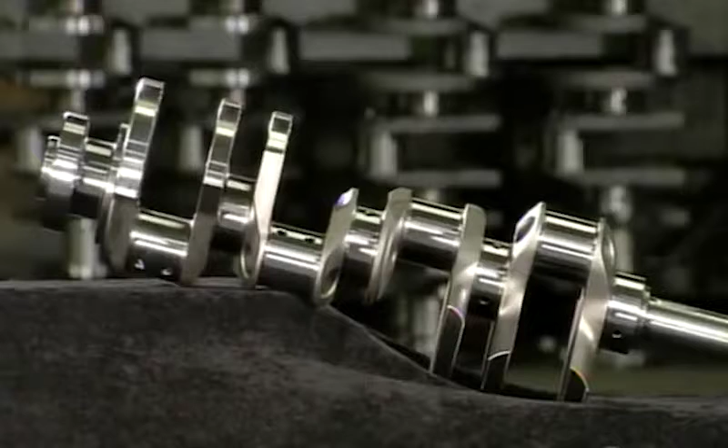From this subject, automotive component manufacturing, the car component that I chose is the crankshaft. The crankshaft is essentially the backbone of the internal combustion engine. The crankshaft is responsible for the proper operation of the engine and converting a linear motion to a rotational motion.

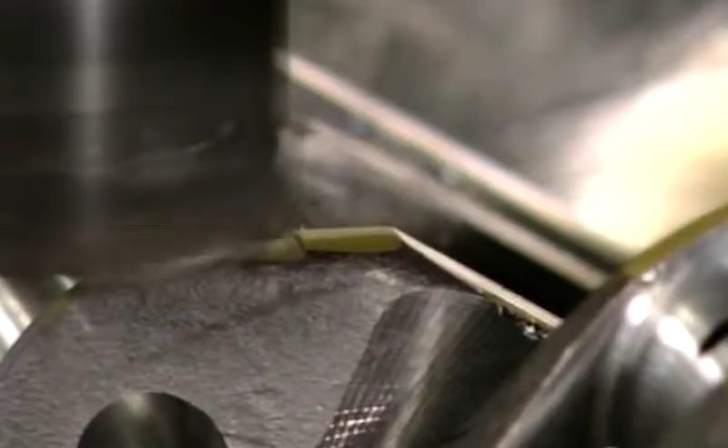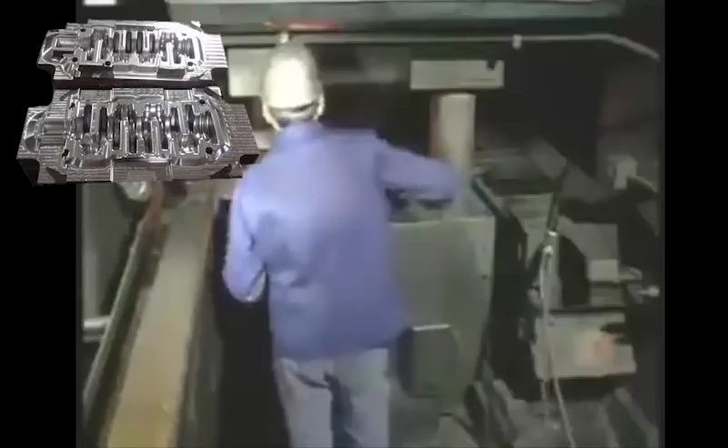For the manufacturing process, crankshaft-sized billets are induction heated up to 2500 Fahrenheit, or 1300 Celsius, for forging temperature. The heated billets are placed into a giant press with a forging die applying 150 to 250 tons of pressure. Afterward, the workpiece is clipped. The flash goes to the scrap bin.

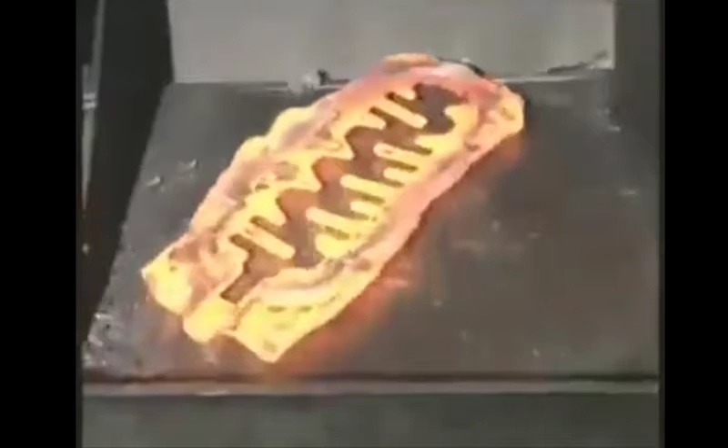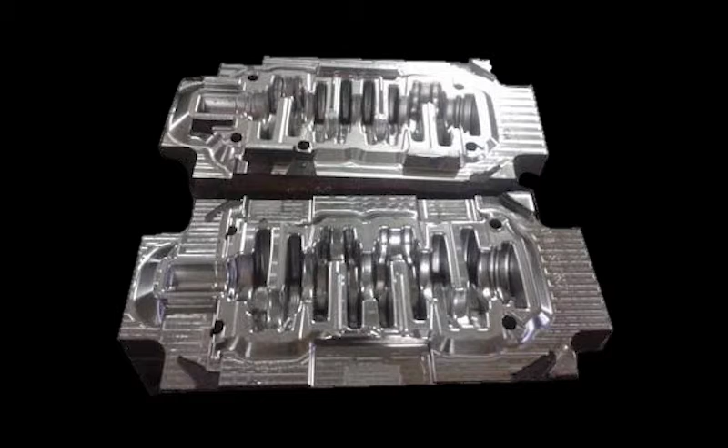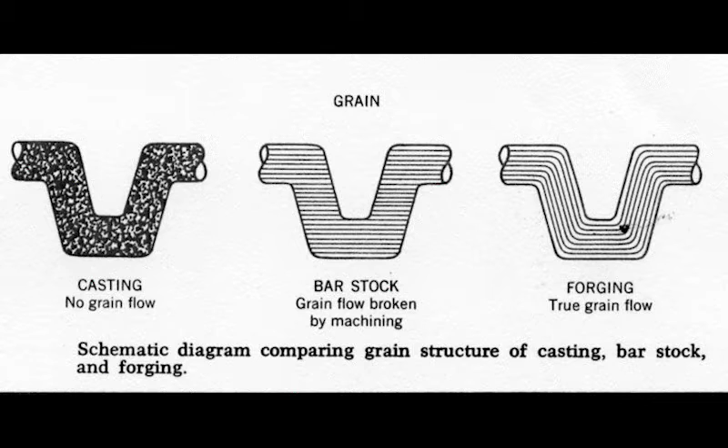The crankshaft is transported to the next station, a twister, an operation in which 5 strokes of the shaft are properly aligned relative to one another by twisting. The forging process itself significantly compresses the grain structure of the forged crankshaft. It creates a much more uniform grain structure compared to its cast counterpart. And this means that a forged crankshaft is typically not just stronger but significantly more ductile when compared to a cast crankshaft.

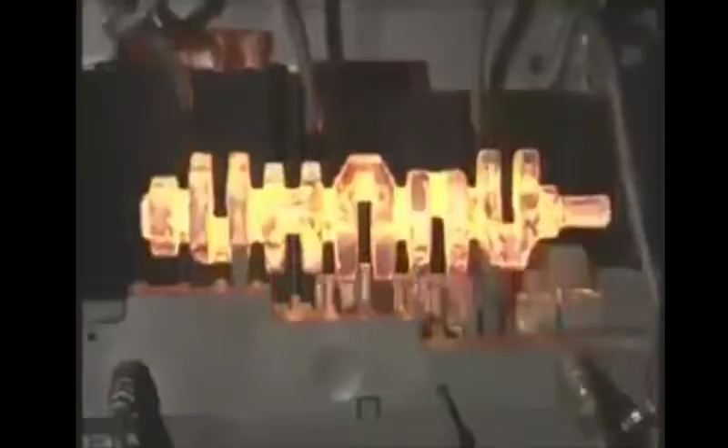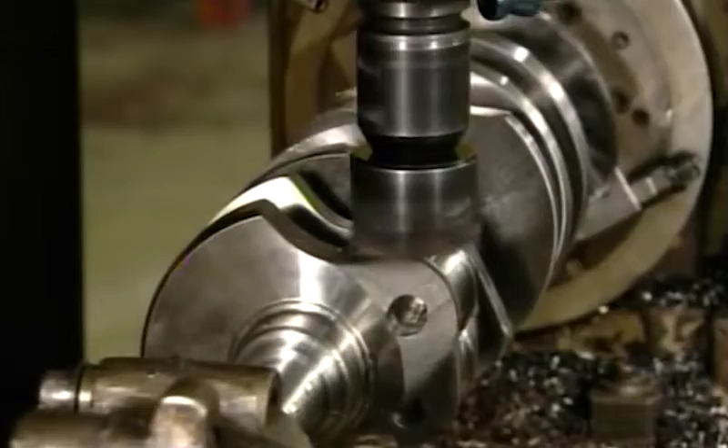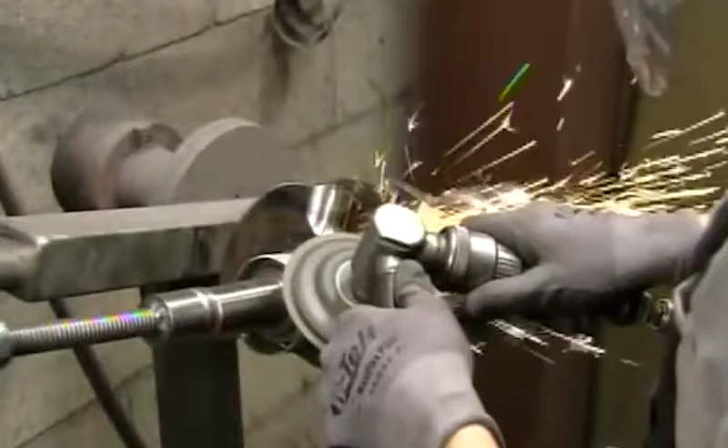The final operation in producing a raw forged crankshaft is hot sizing. During this process, the crankshaft receives its required accuracy in form. The CNC machine shaves off several dimensions in the counterweight process. This process slims it down for balanced performance. A turning machine drills a hole at one of the bearings to reduce the total weight. Next, the worker removes marks that the machine left on the metal.

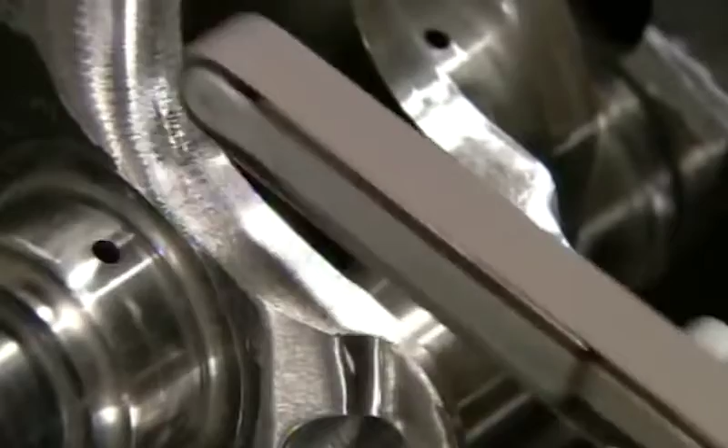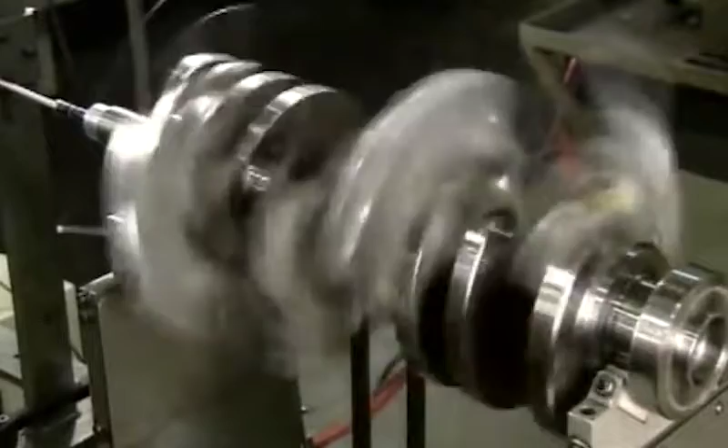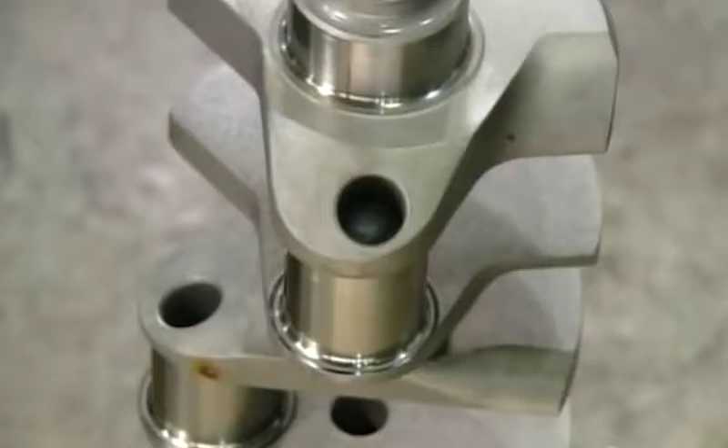Fine glass bead is used to remove the sharp edges and give a consistent finish to the crankshaft. The crankshaft spins in a lathe to remove a precise amount of metal to make a fine finished surface. The crankshaft takes another spin with a sensor to detect any unbalance. Then a measurement of the degree of straightness is made. If there is any unbalance, the worker uses a special radius chisel. From this view, at the left is a pass on straightness and balance. We can see the difference in the structure.

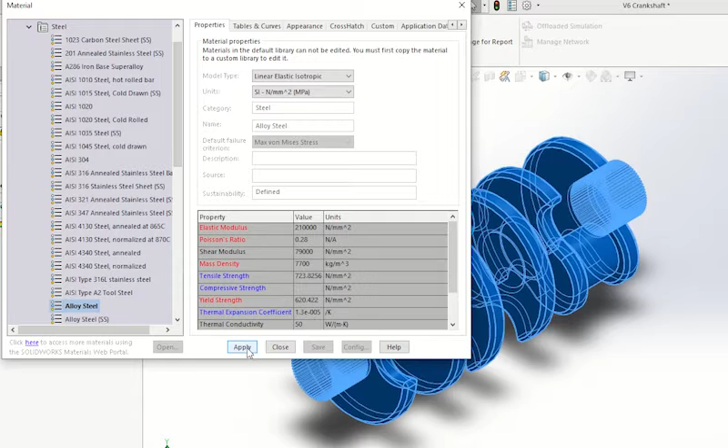For simulation, click on New Study and click Static. Change the name to Crankshaft Force Test, then OK. Next, select the product and apply the materials. I use alloy steel as the material. Then apply a fixed geometry. I assume that the fixed geometry is at the end of the left and right side.

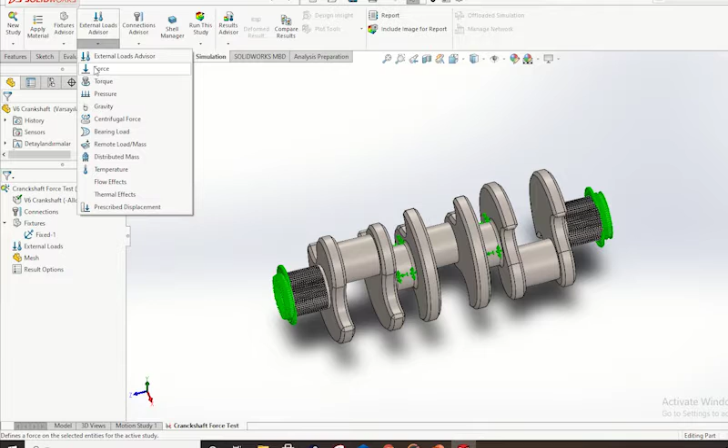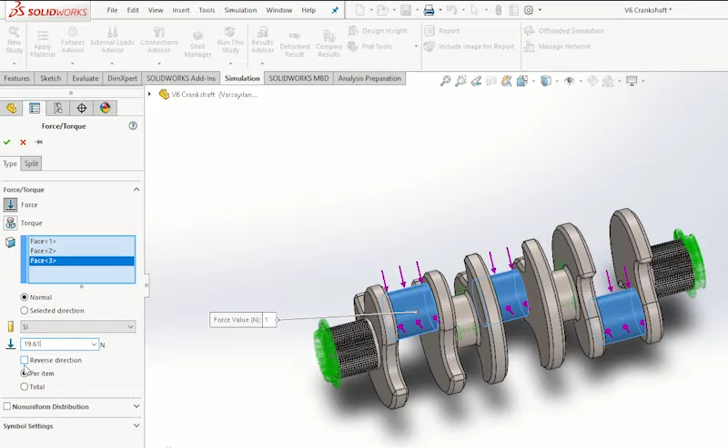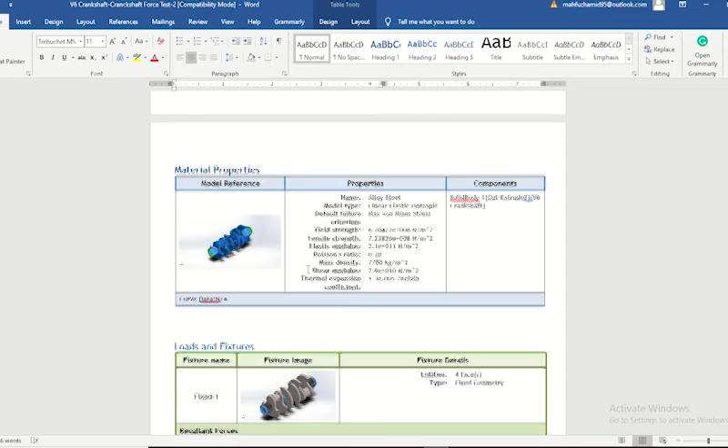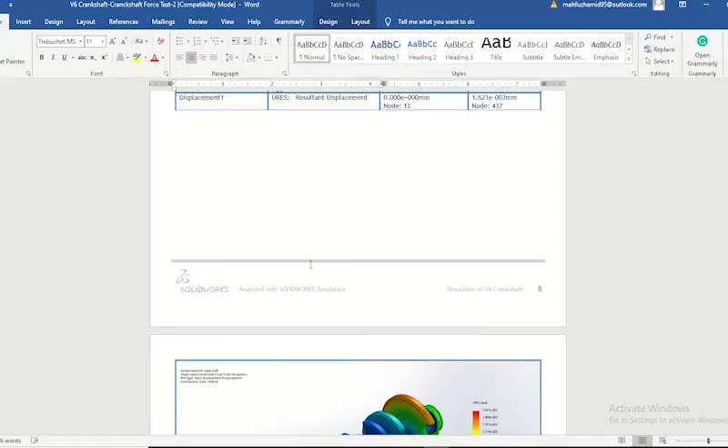Then apply a force. I select 3 directions and the Newton is 19.61, converted from 2 kg. Assume that each piston is 2 kg. Then we can run the study. So the result. Then to bring up a report. This is the report result. If you want to show the animation, right click on stress and click on animation. So it will display the force motion.

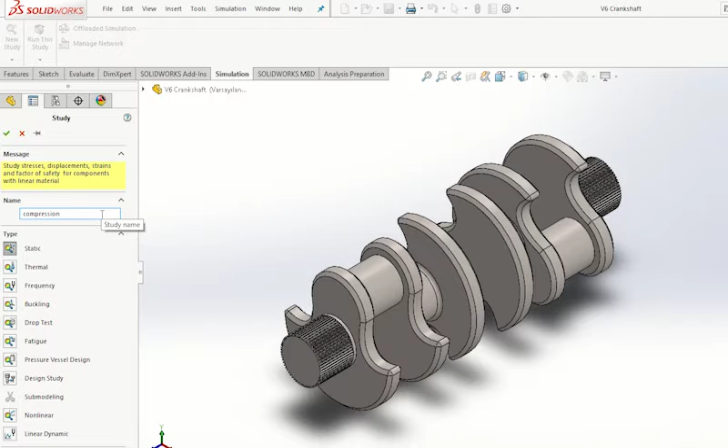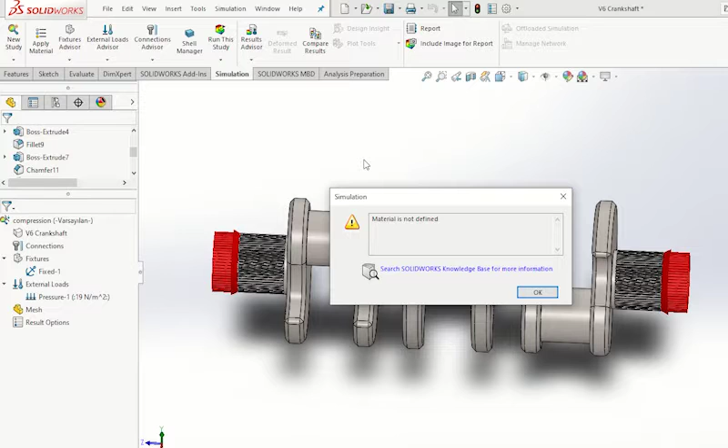For the compression test, select new study, static, and click OK. Then fix geometry, assumed at the middle, then OK, and apply a force with pressure at the end of left and right, at 19 Newton per square meter. Then you can run the study. Besides that, select material, alloy steel, and apply. Okay, you can run the study.

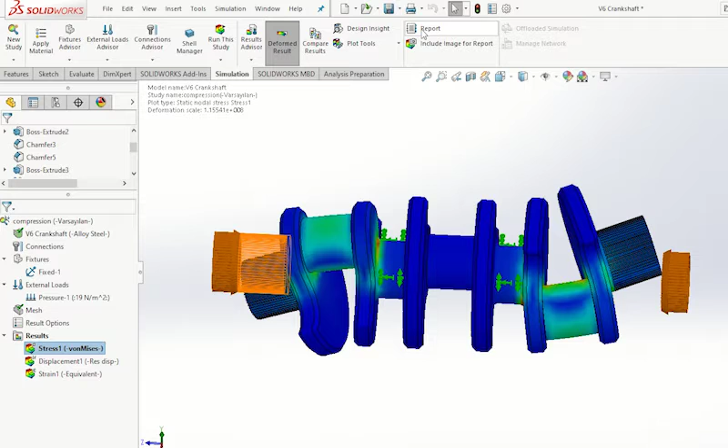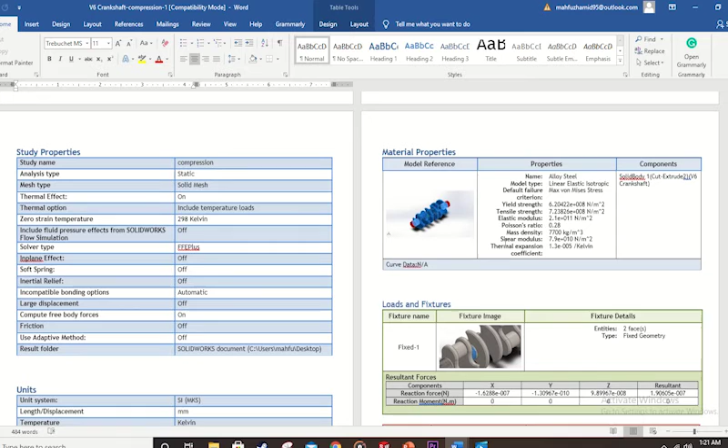This is the result from the simulation. That's the animation. Then we can generate a report. This is the report that I generated: mesh, results, stress, displacement, and strain.